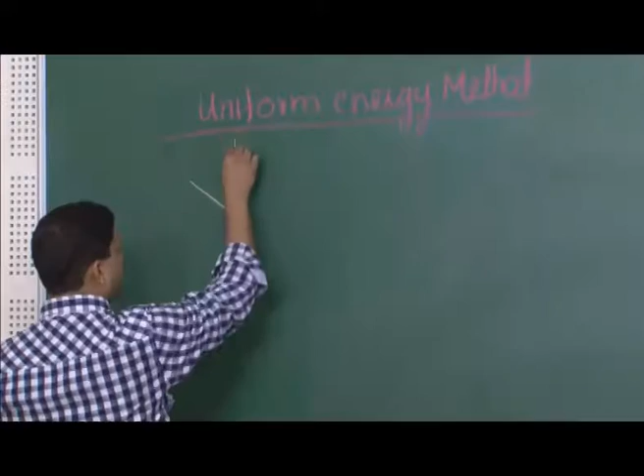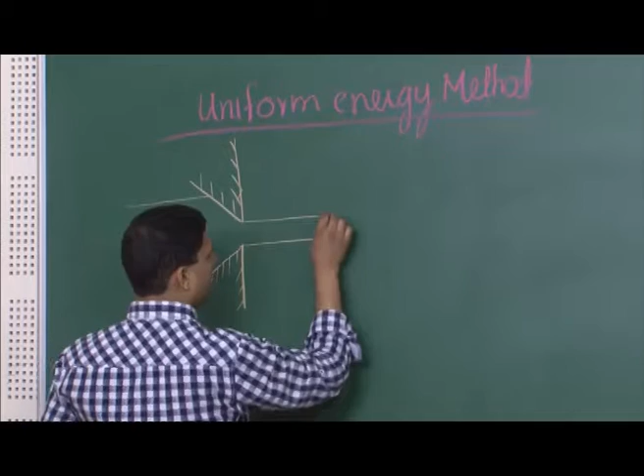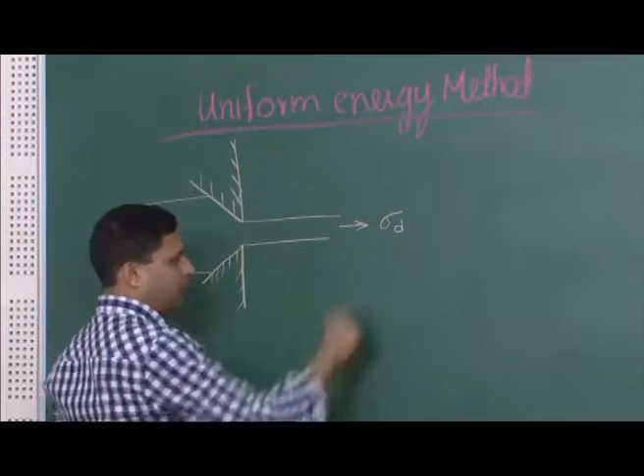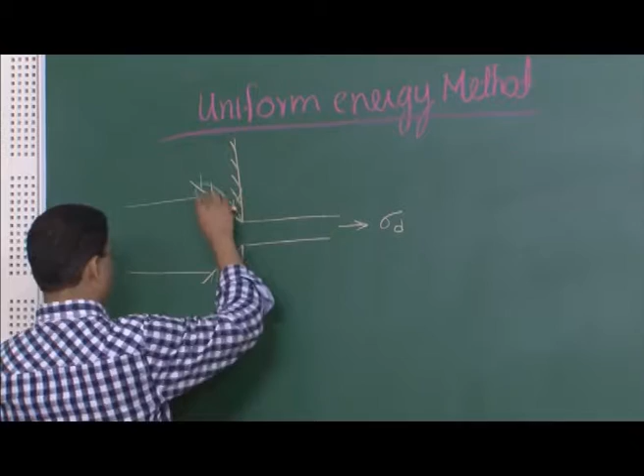So this is how the setup will look like for wire drawing. This is the die, and here goes your original diameter wire, and out comes the reduced diameter wire, and it is here that you apply a stress sigma d. When you are pulling it out, the wire gets pulled in and gets drawn after getting deformed. These are the regions where the flow or deformation is taking place.

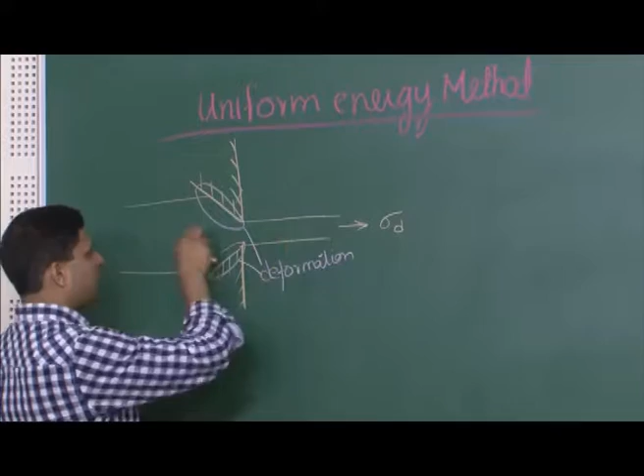What you will note here is that when you are pulling out from a larger diameter to a wire of thinner diameter, that is possible because this part is work hardened, and therefore has a higher yield stress compared to this one, so you can pull it out and still not break this. In fact, that leads to another aspect we need to understand about drawing, which is the maximum drawing reduction that you can get.

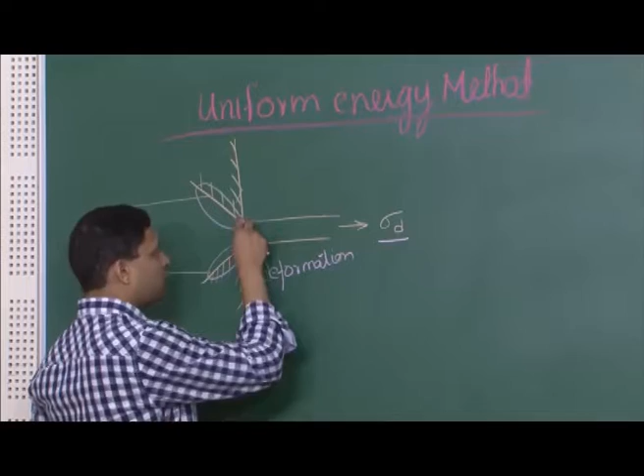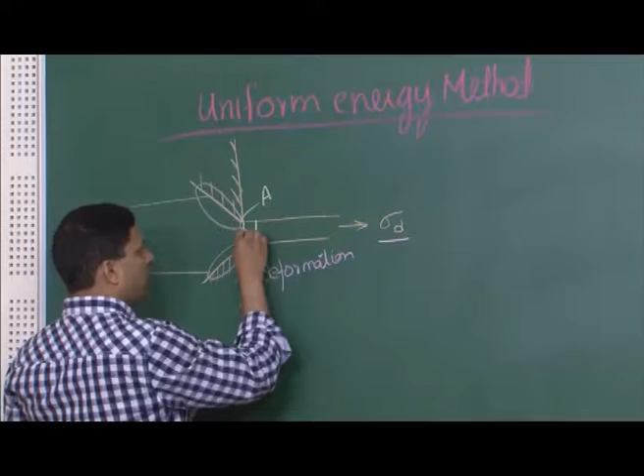But before that, our aim is to relate sigma d to ideal work per unit volume. So let us draw a bit of how it will look like. Let us say this is the area, which is the final area, and this is some length delta L by which you have moved this element.

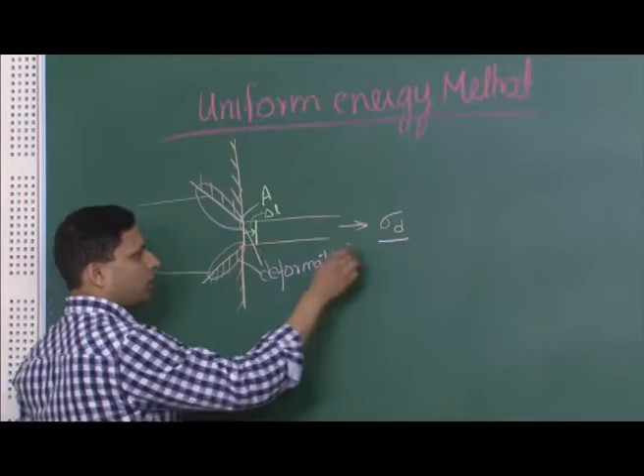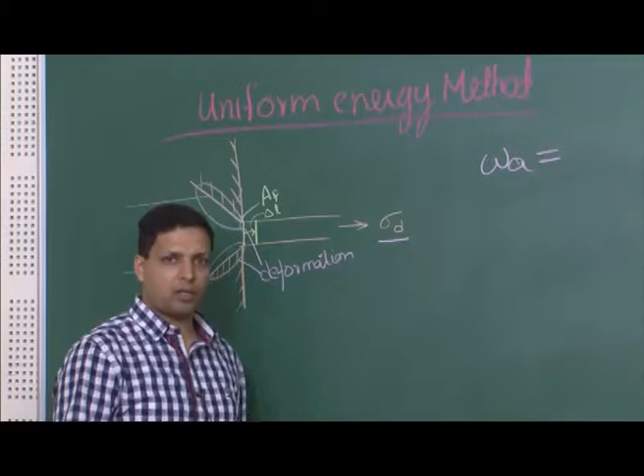Let us say a very infinitesimal element that has been drawn is coming out. You are applying a stress sigma d onto this, and it moves by a distance delta L, and the area of this is A final. Now if I want to write down the actual work, not the ideal work, because you are applying some stress sigma d. So far we are not assuming friction or redundant work is non-existent; we are assuming sigma d exists in spite of all those additional deformations.

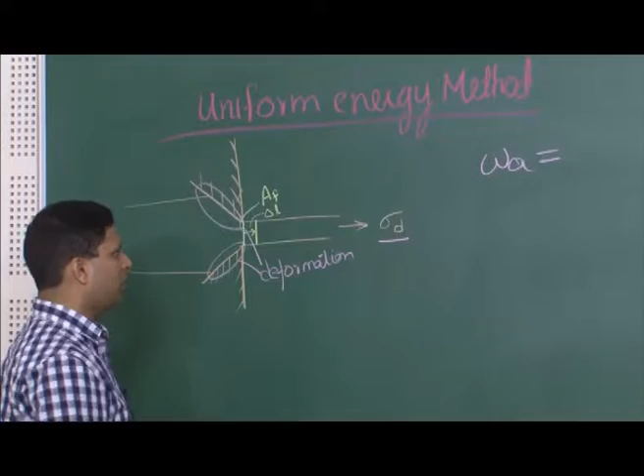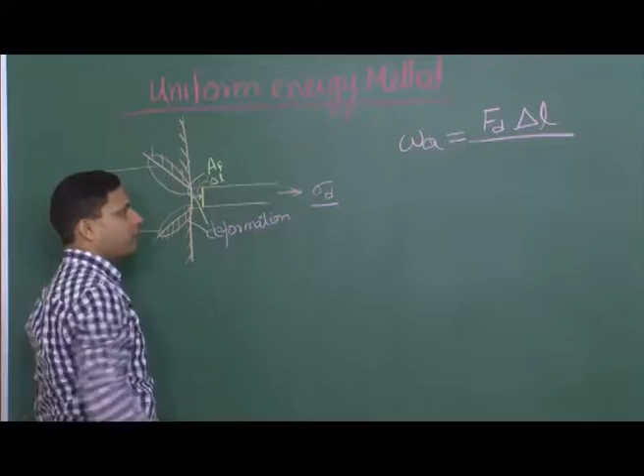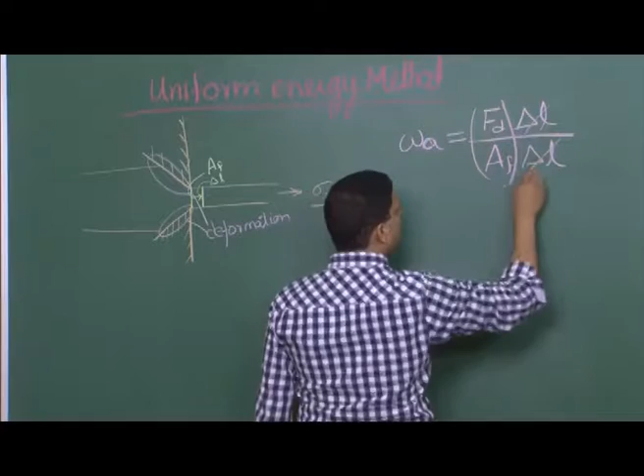So here the actual work would be equal to F times d, which is the total work. Let us say this is sigma d, which is nothing but F over A final. So this is F times d, or in terms of work per unit volume, this is the total work, force times distance, divided by volume, which is A final times delta L, and this is what we know as sigma d. These two get cancelled out, so actual work comes out to be equal to sigma d.

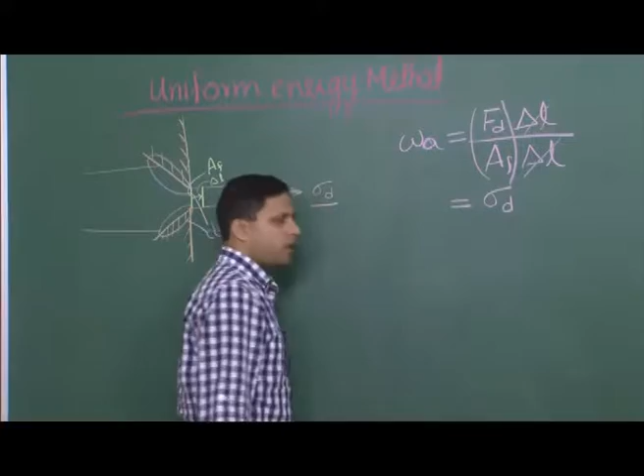Another thing you should realize is that sigma d is actually stress, which has a different unit, and actual work per unit volume is a different quantity with a different unit. This usually has units of megapascal, and this has units of megajoule per cubic metre, and this is also true when we related actual work to the extrusion pressure.

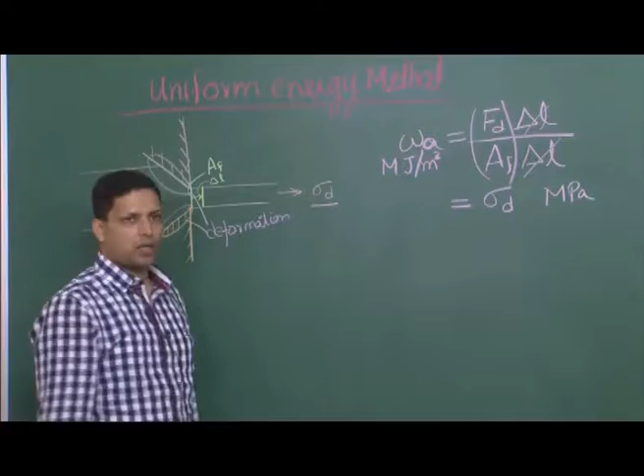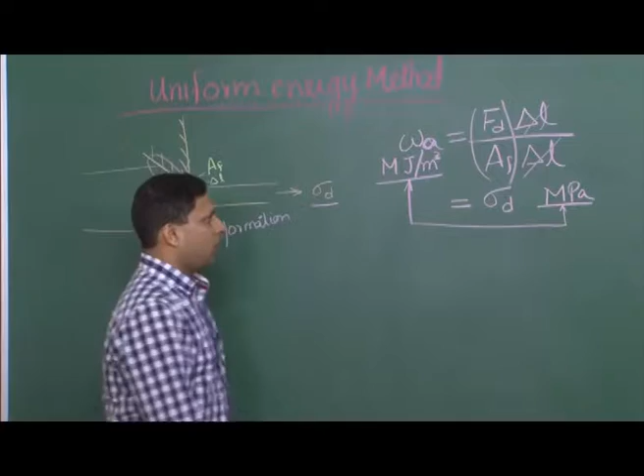But what you will see is that dimensionally both of them are one and the same thing, and that is obvious because we have used this equation here. This is the total work divided by volume, which is work per unit volume, and once you cancel out the common term, you get the units of stress. So dimensionally both of these are one and the same thing, although unit-wise they represent different things.

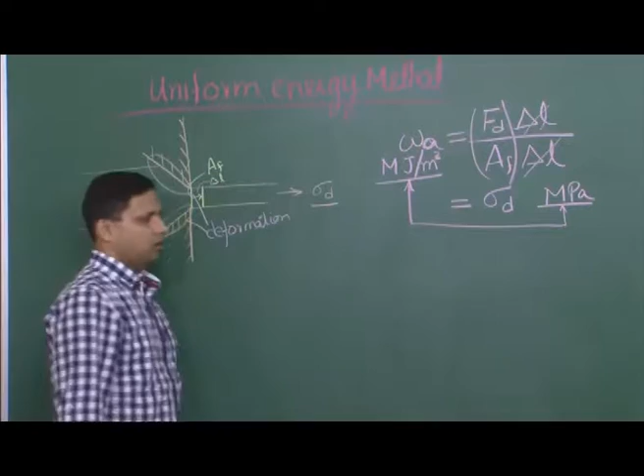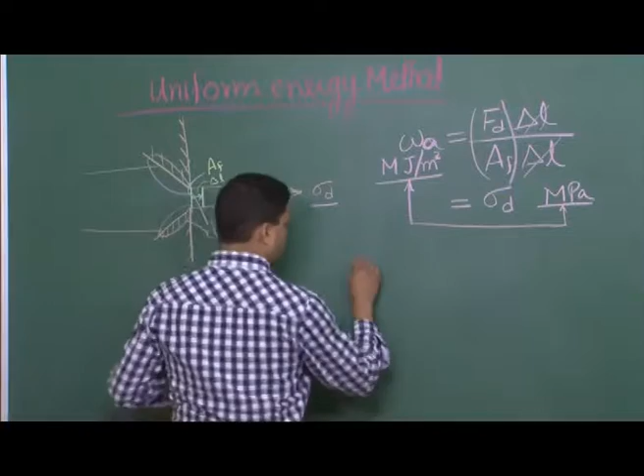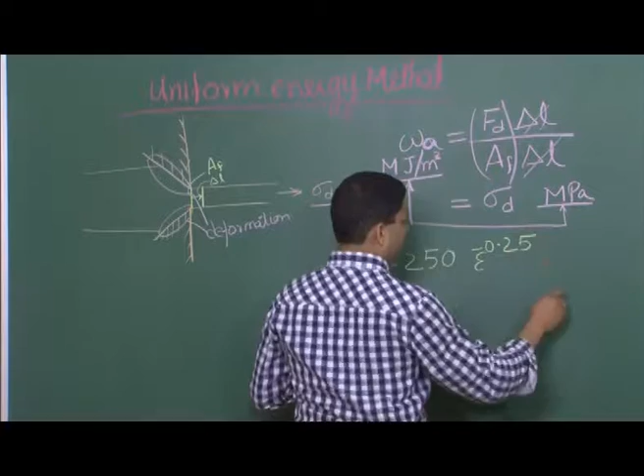This is even more clear when you look at the previous example where we had given a material with flow behavior like this, and we said it is being drawn from 12.7 millimeter to 11.5 millimeter. Over there we saw, solving this in the previous class, that actual work came out in megajoule per meter cube.

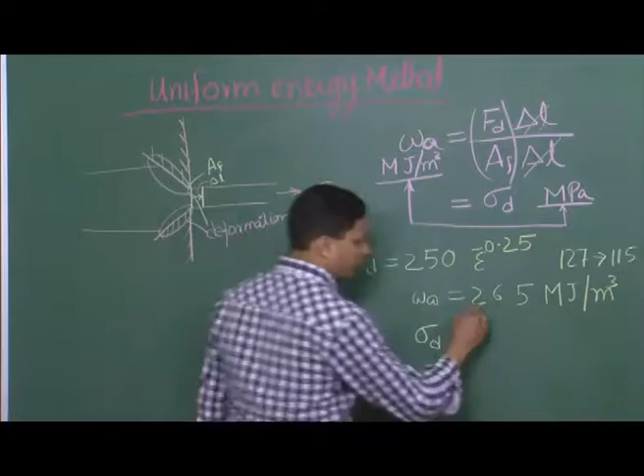Now if I give you the same material and same condition, and this time ask you to find out what is sigma d, the drawing stress, you need not solve it again. All you need to see is that the value will be the same, because the equation is the same, just that the unit would be megapascal.

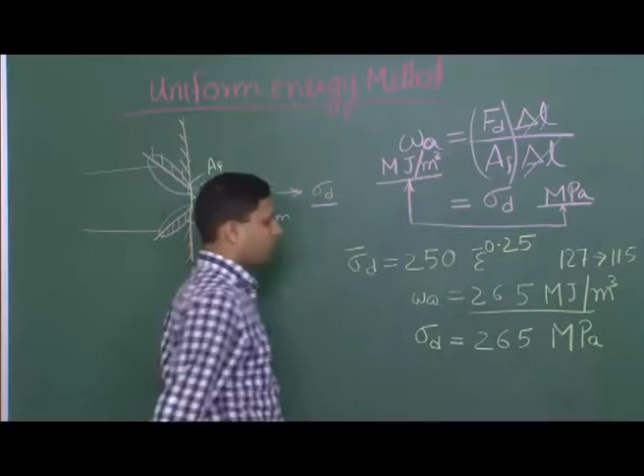So, when you are applying or reducing from 12.7 millimeter to 11.5 millimeter for a material which has a flow strength like this, this is the drawing stress that needs to be applied, and this is the actual work per unit volume being carried out.

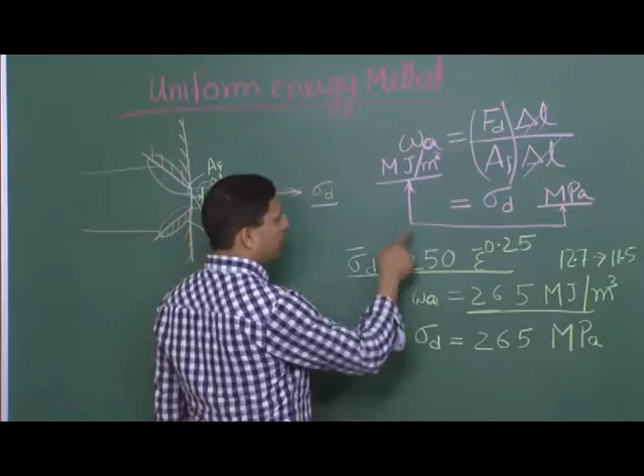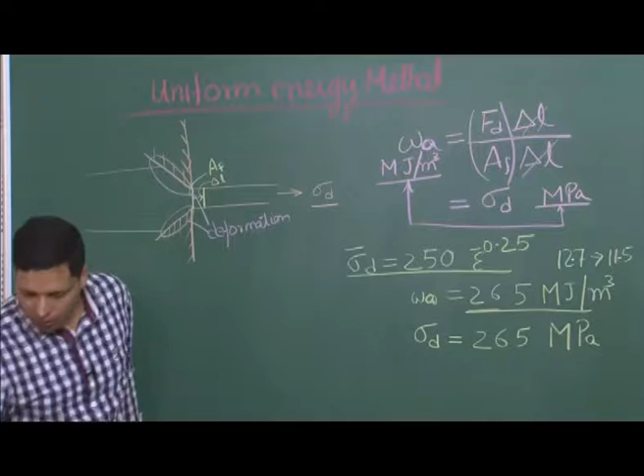Now, when we said that sigma d is equal to that work, which actually is equal to sigma d, in the previous one there is one more factor before we equate sigma d to the total work, which is integral of sigma times d epsilon. We said that work actual is greater than or equal to work ideal, or work actual, which we have already shown as sigma d, is greater than equal to integral sigma d epsilon. And if you want to put an efficiency factor, you can write it like this.

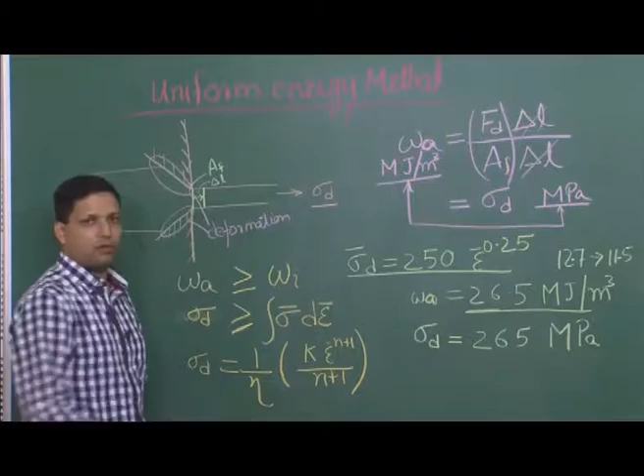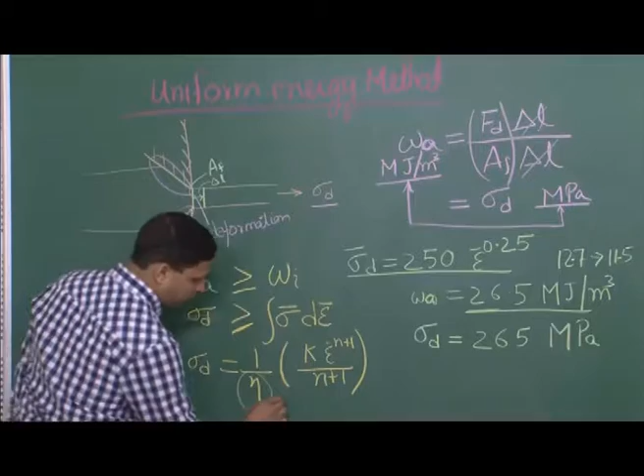Assuming power law behavior, it will come out to this, and this efficiency factor is what is accommodating your redundant deformation and frictional deformation. So, if those are not present, this means that eta is equal to 1, and therefore sigma d is equal to.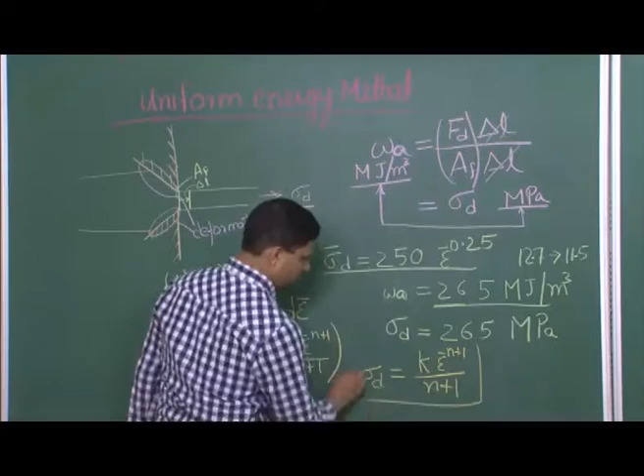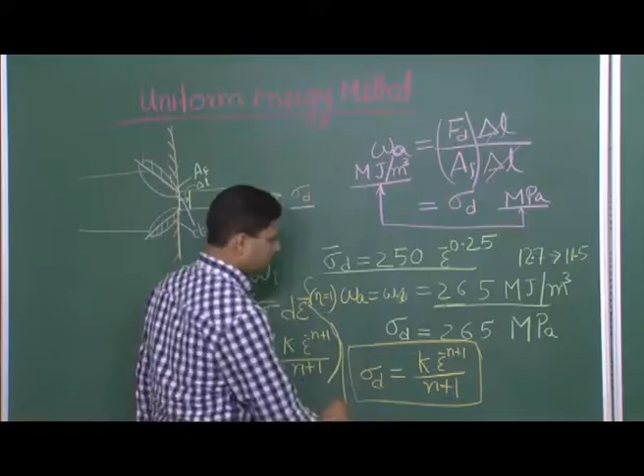In this part what we are assuming is that, as the name suggests, uniform energy method, there is no redundant deformation or any kind of frictional work going on, and therefore we are able to relate the actual work, which is sigma d, to the ideal work, which is integral of sigma bar times d epsilon bar. So, even in this problem that we solved, the actual work is 265 megajoule per meter cube, which is actually the ideal work, given that efficiency equals 1. In those conditions, sigma d will also come out to 265 megapascal. So, the values would remain same, only the units would change.

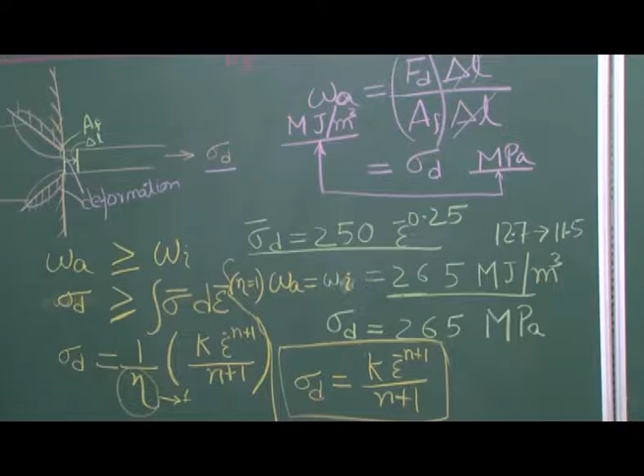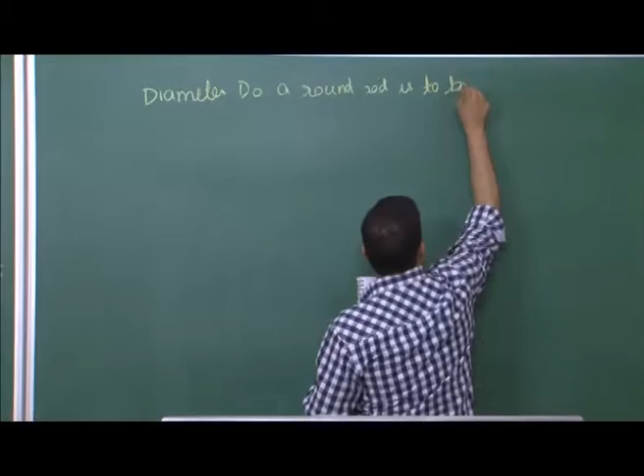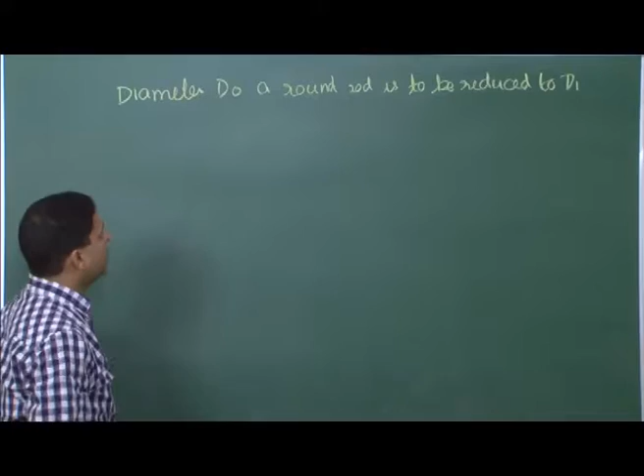Now, there is another very interesting aspect about wire drawing that we will see in this next example. Let us say a diameter d naught of a round wire or a rod is to be reduced to d1. So d naught is your initial diameter and d1 is your final diameter. Now, you can do this by two ways: one is wire drawing and the other is by pulling in tension.

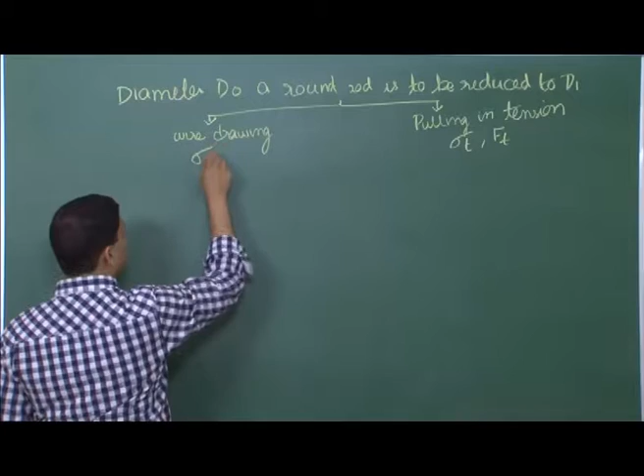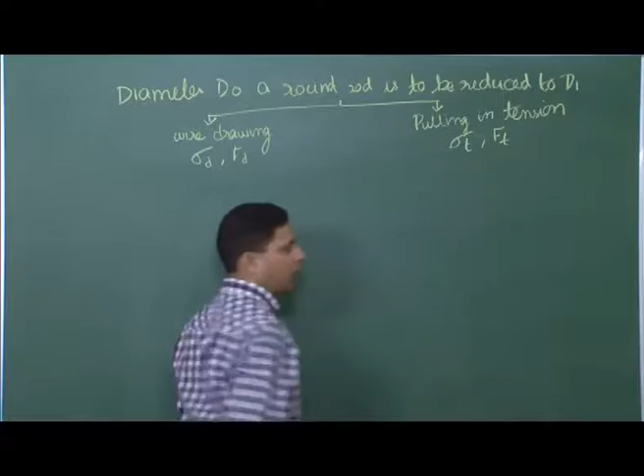So, let us say if you are pulling in tension, there is a stress sigma t, or if you want to calculate in terms of force, the force is F t. If you are using wire drawing, let us say the stress you are applying is sigma d and the force you are applying is F d. Now, the question is, is there any relation between these two? Can we say something substantial about sigma d and sigma t, or F d and F t?

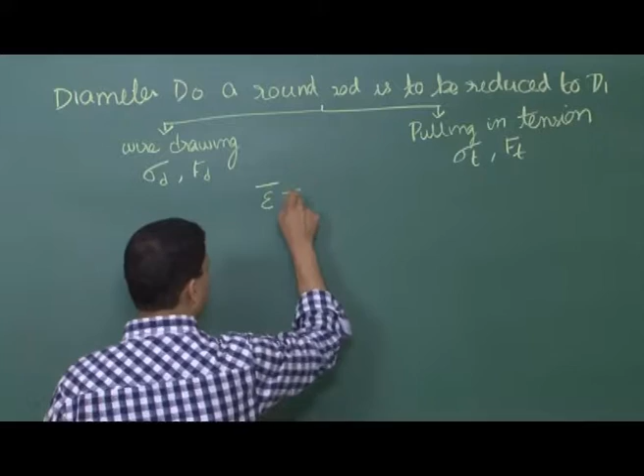Let us see. From our earlier discussions, we know that effective strain can be given by 2 ln d naught by d1. Basically it should be ln a naught by a1, but since area is proportional to d naught square and d square, it comes out to 2 times ln d naught by d1.

Now, if we are talking about sigma t, so if this is the strain and we are pulling it in tension, the stress required for this amount of work, assuming power law behavior, would be given by k epsilon bar to the power n. So, this is the stress that would be required if you are pulling in tension to reduce our wire from diameter d naught to d1.

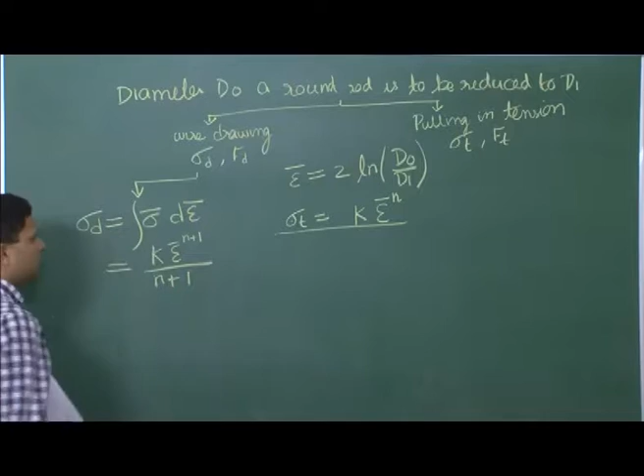Now, let us look at what will be the stress required for reducing the rod diameter from d naught to d1, assuming wire drawing operation. Again, under ideal work, sigma d is equal to integral of sigma bar d epsilon bar, which is equal to k epsilon bar to the power n plus 1, divided by n plus 1. So, the first thing you notice is that the values that have come out are actually different.

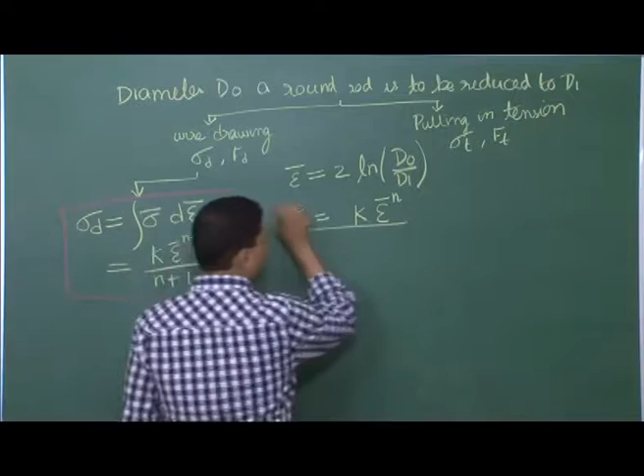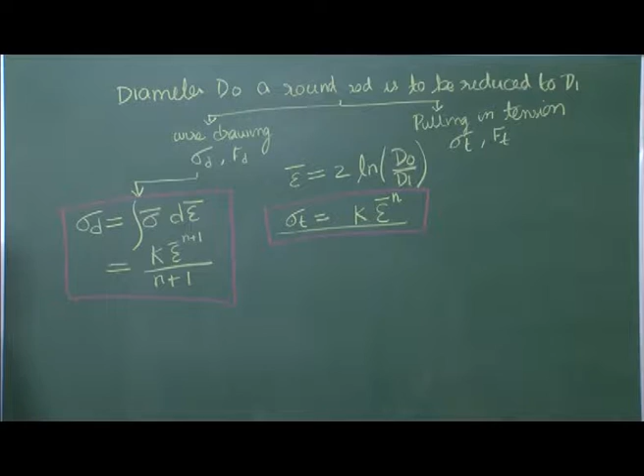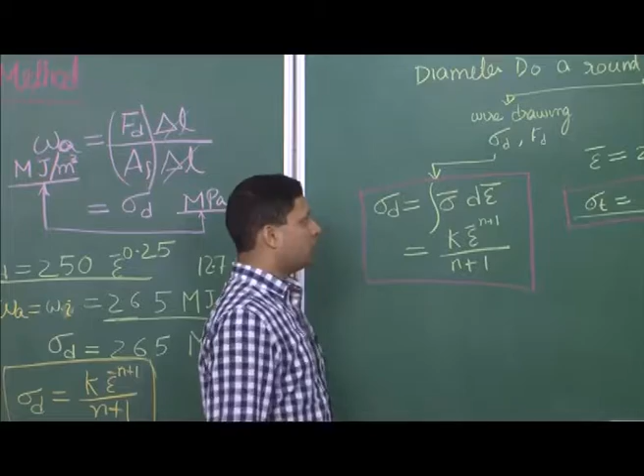So, one must be larger and the other must be smaller, which means one method would allow you to apply less stress and still get the same amount of deformation, while the other method will require higher stress. If we are able to know it beforehand, it will be good for us, because we can use it every time and work with much lower stresses to produce this kind of deformation. So, now in order to compare, let us divide one by the other.

So, let me put it like this. So, many of the terms will get cancelled, and what I will get is epsilon bar by 1 plus n.

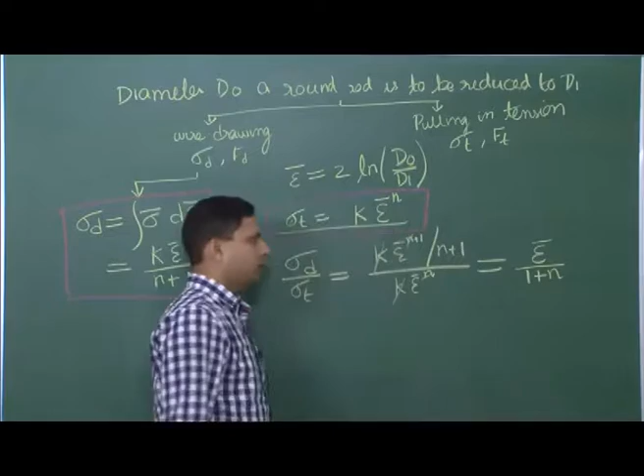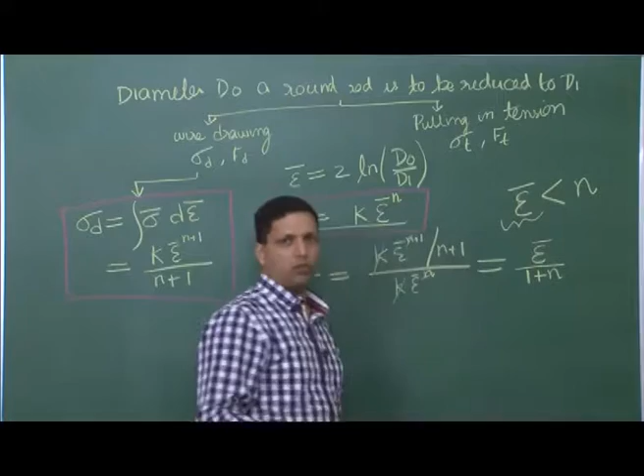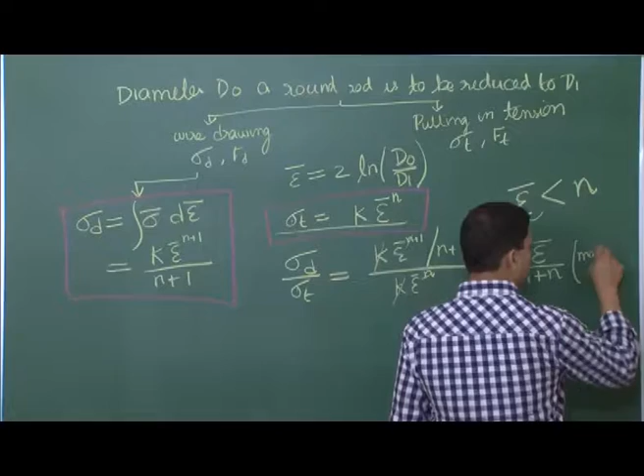So, the ratio of sigma d to sigma t is epsilon bar by 1 plus n. Now, can we say anything about this? Is it greater than 1, less than 1, anything like this? Over here, we need to use a fact that epsilon bar that we are looking at always is less than the value n. So, our uniform deformation, or the point up to which we are looking for uniform deformation, is only true up to this point n, and therefore the maximum value that this ratio can take is n by n plus 1.

Therefore, it means that sigma d by sigma t is less than 1, because this is n divided by n plus 1. So, the denominator is always greater than the numerator, and therefore this ratio sigma d by sigma t is always less than 1, and what that means is that stress required for drawing is less than stress required for tension.

So, you see this is, you can say, a very amazing or interesting result. It says that you can apply less stress than that required in tension and still get that kind of deformation. So, this is also very useful for our drawing operation, because it allows us to get much larger strains or much larger area reduction, because now you can see we are able to get much lesser stress value and get similar kind of deformation that we get in tension.

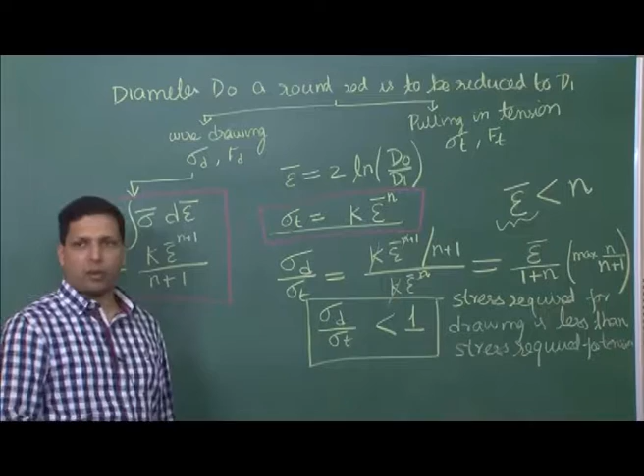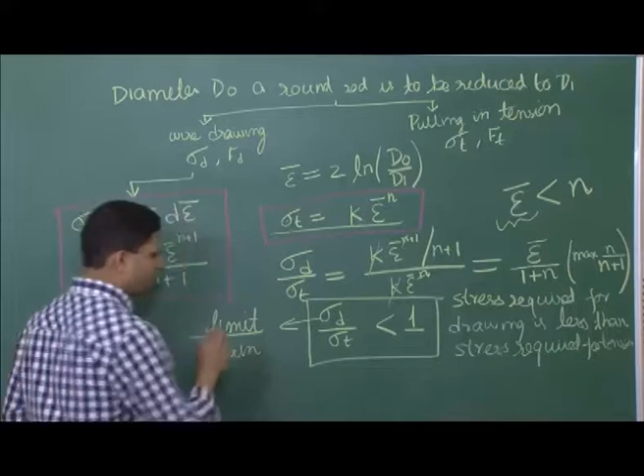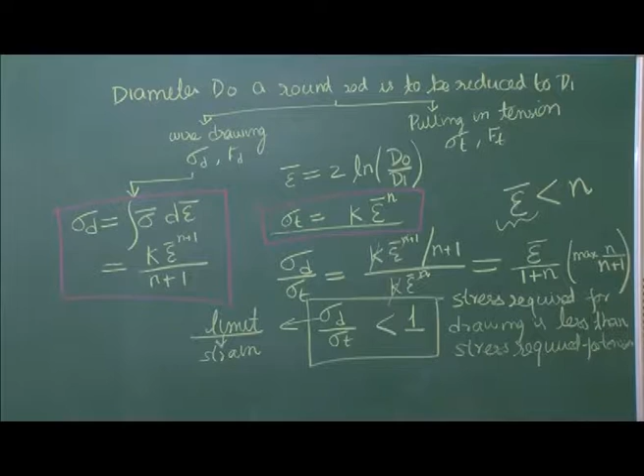So, now let us move to the next aspect for wire drawing, which is to find out if this is the drawing stress, is there a limit that we can apply the drawing stress, and if there is a limit to it, is there a limit to the strain or area reduction that we can obtain. So, that is our next goal. So, we have seen several aspects of wire drawing so far, and now we are moving to another interesting aspect of wire drawing, which is to find out maximum drawability.

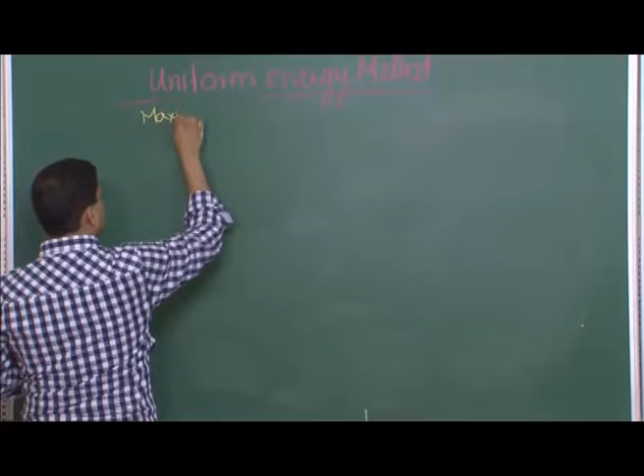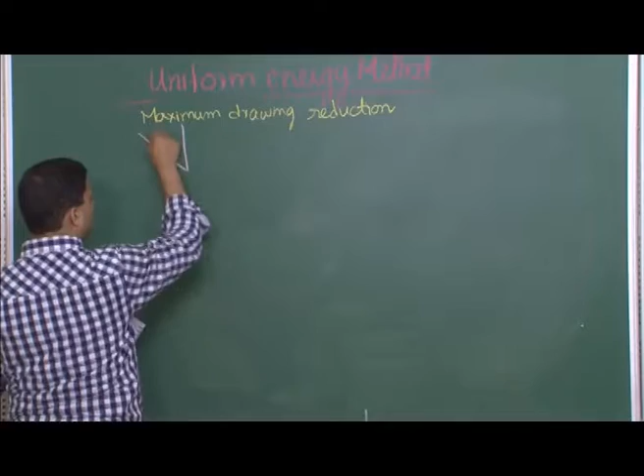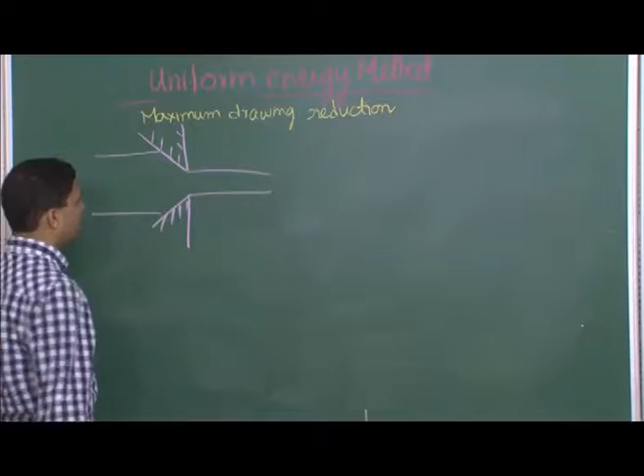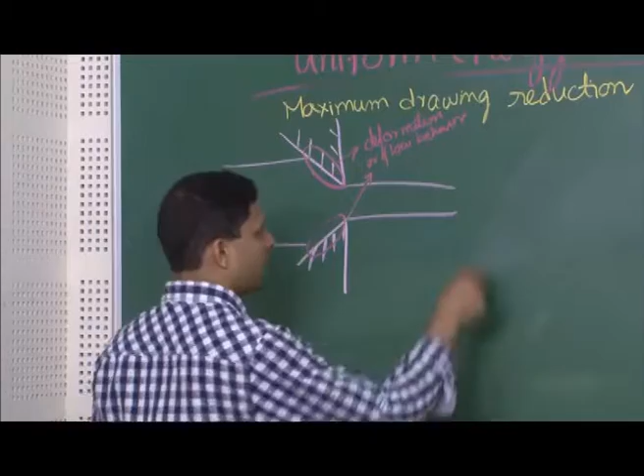Okay, so let me draw our wire drawing operation again. Never mind, we can quickly draw it. So, here is our wire drawing operation, and like I said, this is where your deformation or flow stress or flow behavior is taking place. So, these are the two regions where deformation or flow behavior is taking place, and this is where you are applying sigma d. Now, what we see is that you are applying stress to a thinner region and able to pull out a thicker region.

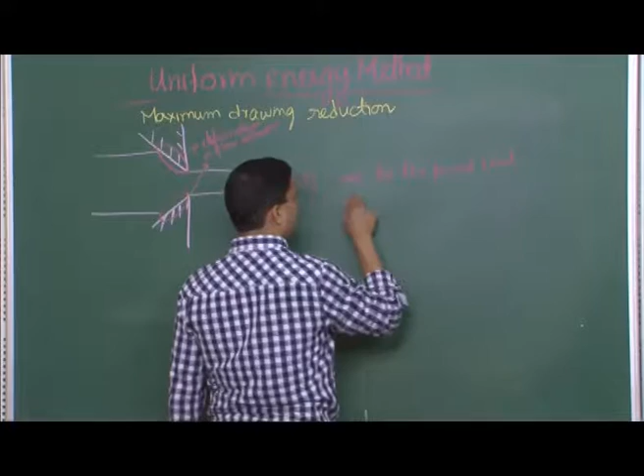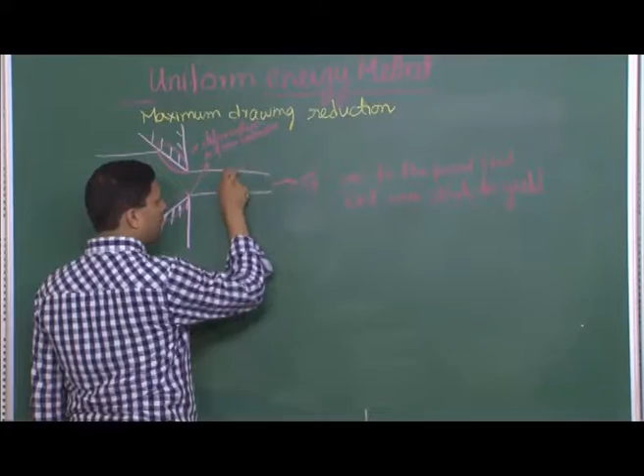Okay, so that much we saw, but now let us say this sigma d increases to a point that the strain, or this region, starts to yield. So, let us say sigma d increases to the point that exit wire starts to yield. So, what will happen? What will happen is that you will start getting flow or yield in the exit region. Is that desirable?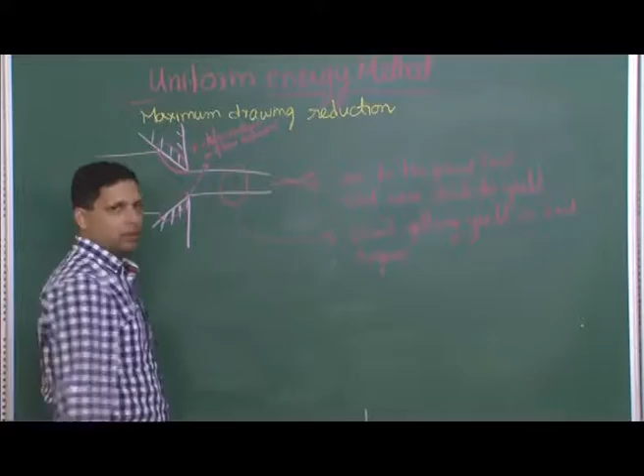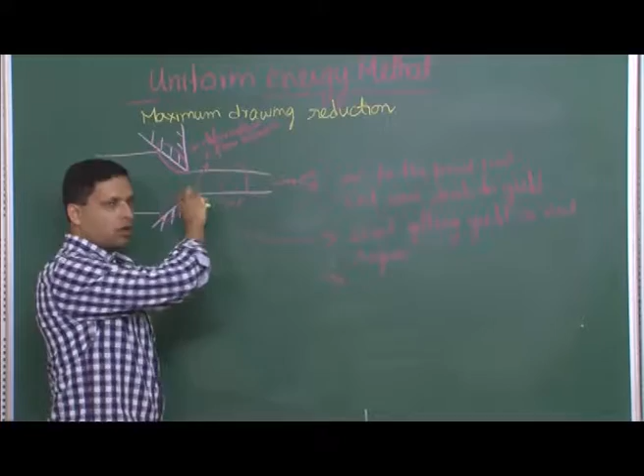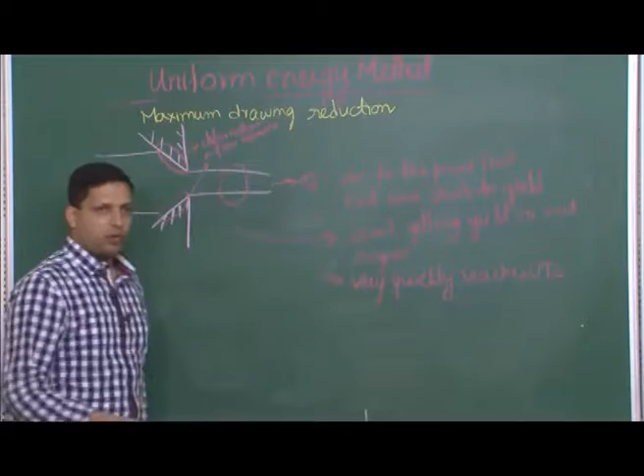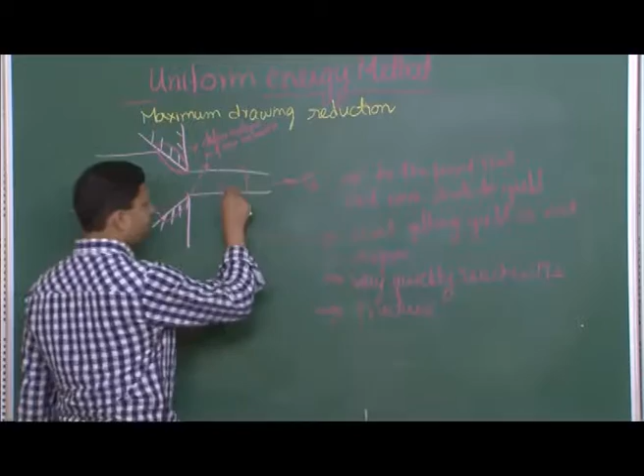So, you are now getting extension or yielding in this region, and eventually what will happen if it keeps on, if it reaches beyond, and in most cases the stress or the work hardened material will already be so much work hardened that once it starts to yield, it would have very quickly reached UTS value. So, if it starts to yield and it very quickly reaches UTS, then the next step is that it will fracture. So, the wire will fracture from this region and it will not be drawing the original thick diameter wire, and the whole setup will go haywire.

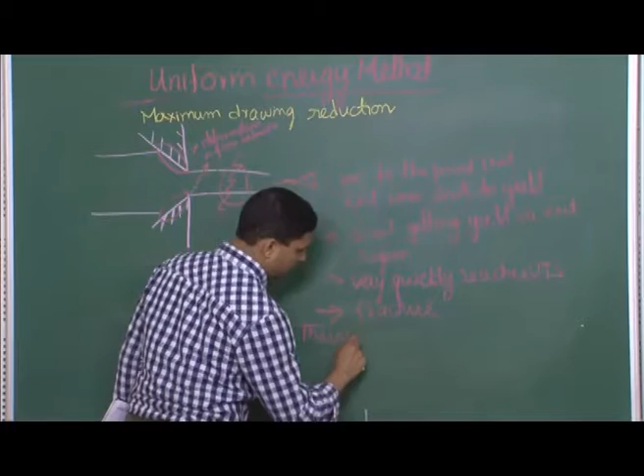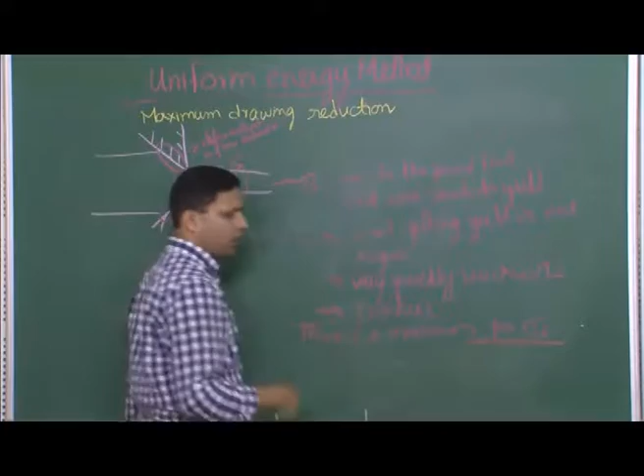That is what we do not want, and that implies inherently that there is a maximum for sigma d. You cannot apply sigma d beyond this value. So, that is what I said, that there is a limit, and we see now why there is a limit, because it will lead to the failure of the wire drawing operation. In industry these things are kept in succession, so there is one wire drawing operation feeding into another wire drawing operation and so on. It means that the whole operation will get disrupted if any of the wire breaks down. So, not only that, whatever is the maximum, in industry you would actually keep that strain value or the stress value much lower than that maximum value, because you do not want your operation to get disrupted at any stage, otherwise it will involve a lot of effort to restart it.

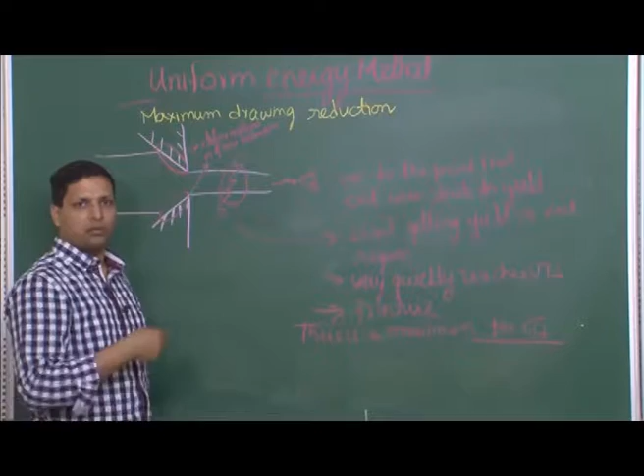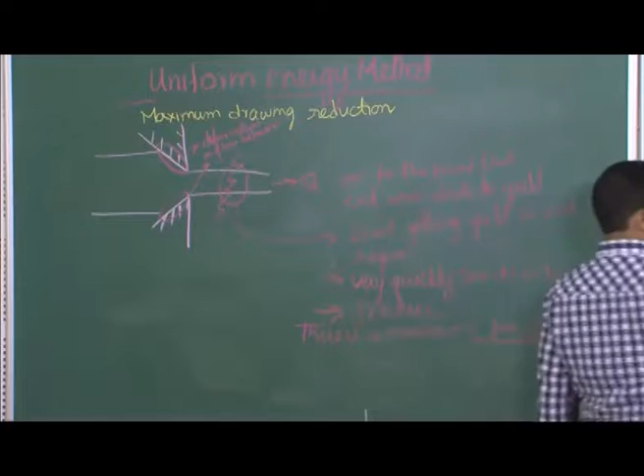So, now let us find out mathematically what is that maximum drawing stress that we must not theoretically cross. So, let us say that the material or this wire has been given a strain of epsilon. Therefore, at that epsilon you will have to apply some drawing stress. Now, for this particular strain, given the power law behavior or any kind of flow behavior, you will also have an equivalent flow stress value.

So, what should be the relation between these two? This drawing stress should be less than or equal to this flow stress. Let me repeat this. This is the deformation that you are giving by the drawing operation, and for that deformation you need to apply some drawing stress. So, I am writing sigma d as a function of some strain, and this is

the flow stress for a given strain. So, if you know the flow behavior of the material, meaning you know sigma as a function of strain, then you can obtain this sigma bar value, or the effective stress value. Now, this drawing stress must be less than, or at the most equal to, this flow stress value, and this we have already seen.

This drawing stress can be written as - let us say that the critical strain value is given by epsilon star - the equation that we obtained just a few minutes back, that drawing stress is equal to 1 by eta times integral of sigma bar times d epsilon bar, and eta is there because we know there may be some redundant work, some frictional work, and this should be less than or equal to, let us say we have a power law behavior. So this should be less than

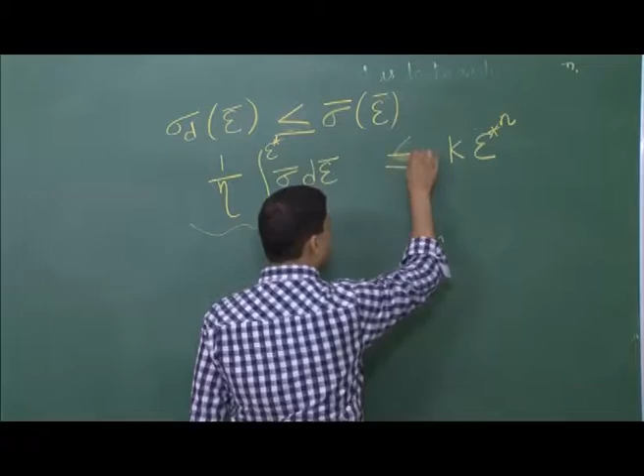the maximum the drawing stress can go, which is equal to this value. So, in order to solve this equation, we will get rid of the inequality and make it equal to, understanding that this is the upper limit that we want. So, this is the upper limit. At the upper limit case, this would be equal to k epsilon to the power n, and then it is just a matter of manipulating the equations.

And remember, epsilon star is what? Epsilon star is the value at which, or the critical strain beyond which, the material should not go. If it goes beyond this, it means we are applying more drawing stress than the material's flow stress behavior allows. So this is the critical strain value, and we will be able to see it and understand it much better graphically. So we will come to that.

But for now, what you will see is that epsilon star is equal to eta times 1 plus n. So, if you know the efficiency of the system, and you know the power law hardening behavior, from that you know the n value, then you would know this is the maximum strain that should be imposed during wire drawing.

If you try to go beyond this strain, what will happen? The material will flow or fracture at the exit point, and it will not actually be flowing or deforming in the die region.

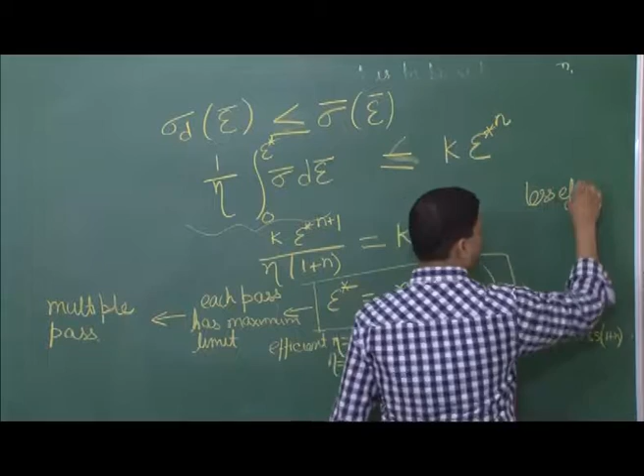So, the less efficient system implies lower deformation per pass.

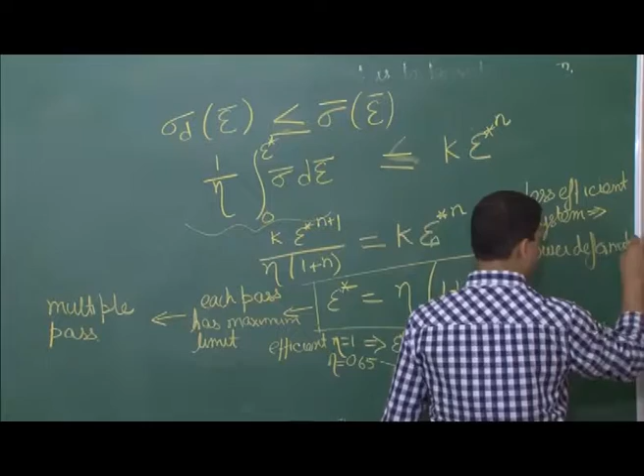Which in turn would imply that if you wanted to go, let us say, from 12.5 millimeter to 5.5 millimeter, you will need a larger number of passes. So, the more efficient the system would be, you can do it in a lesser number of passes. So that is one important message that we get from here.

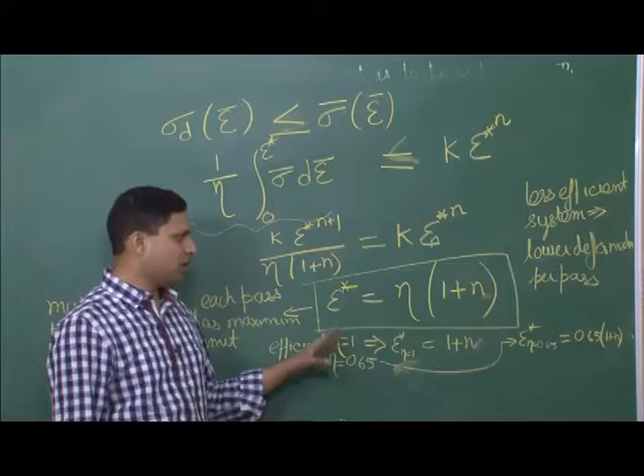We will try to understand some of these concepts using a graph, the stress strain plot, the true stress true strain plot, but we will do that in the next class. So, I will leave you with this to mull over it, to think over it, and try to understand the concept that we have discussed in this class.